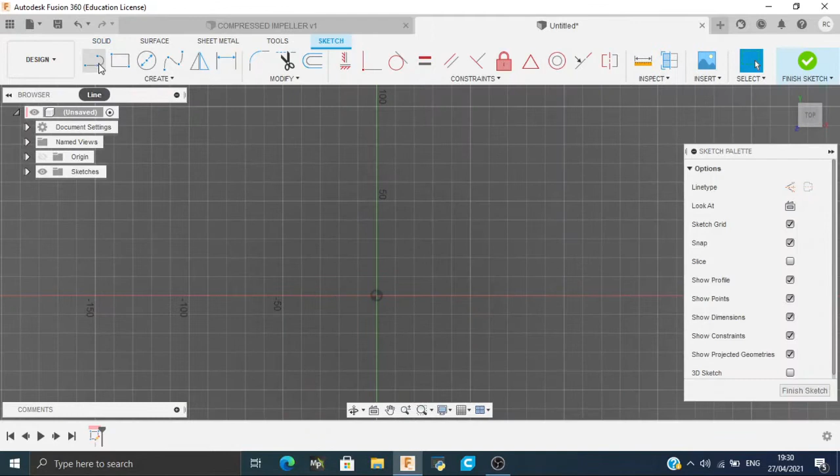To make this compressed impeller, we will create a circle of 76 mm diameter and extrude it to a distance of 10 mm. That would be enough. Press OK.

Now select the top plane and again create a circle of around 18 mm diameter and extrude it to a distance of 30 mm.

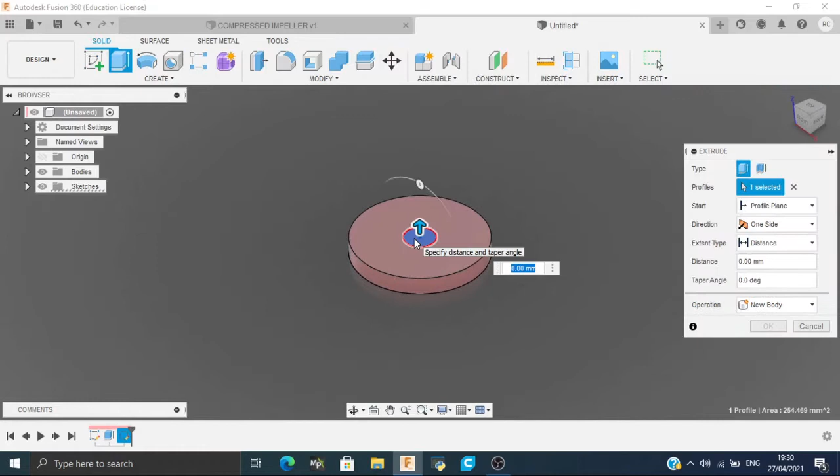After extruding this, go to create, go to coil, select the bottom plane and make a diameter of 76 mm.

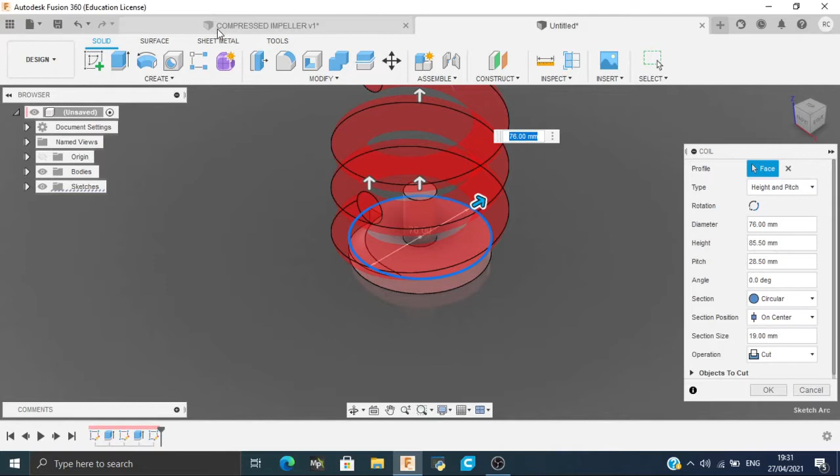For the dimensions, you can see them here: diameter is 76 mm, height is 30 mm, pitch is 250 mm, angle is -10 degrees, section size is 2 mm, and operation is new.

Let's apply it there. Copy the height.

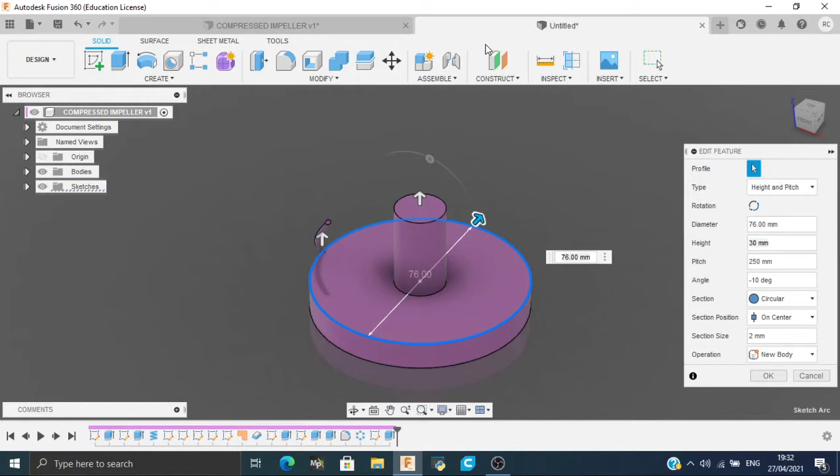Now to create a coil, go to coil from the create dropdown and make a diameter of 76 mm. The height would be 30 mm, the pitch would be 250 mm, and the angle would be -10 degrees, section size would be 2 mm, and operation would be join or new body. Click OK.

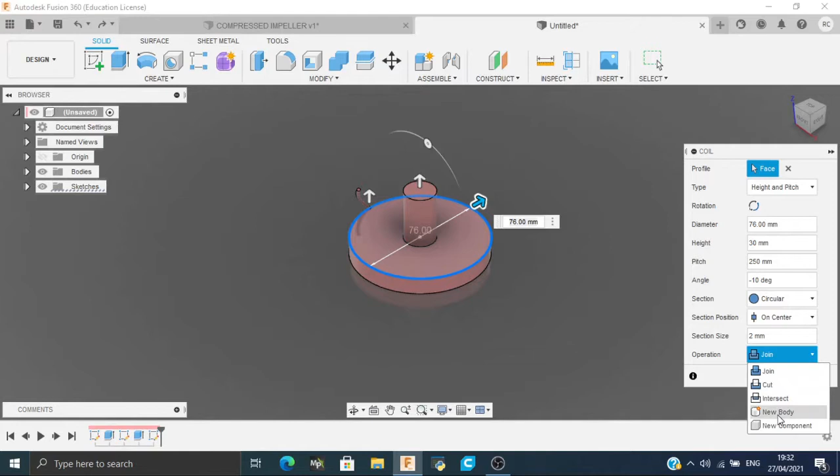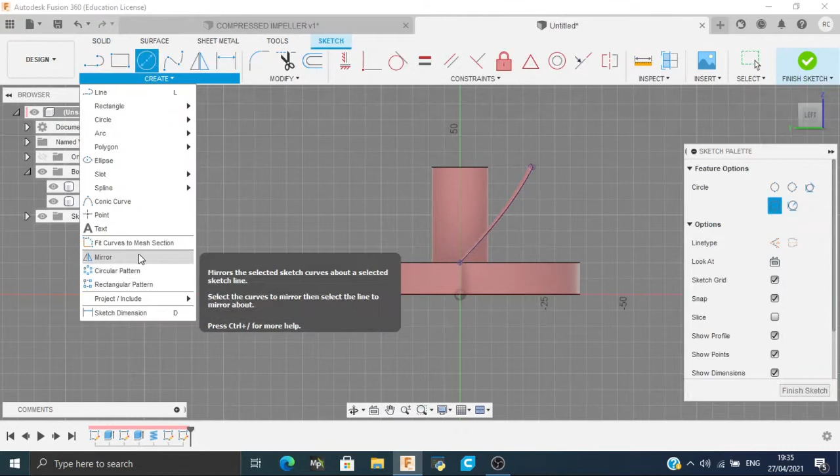Now after making the coil, we have to project the 3D geometry of the coil. So choose any plane, go to create, and select project include 3D geometry, and the geometry would be our coil.

I've already done this. Just hide the second body, or you can rename it as coil.

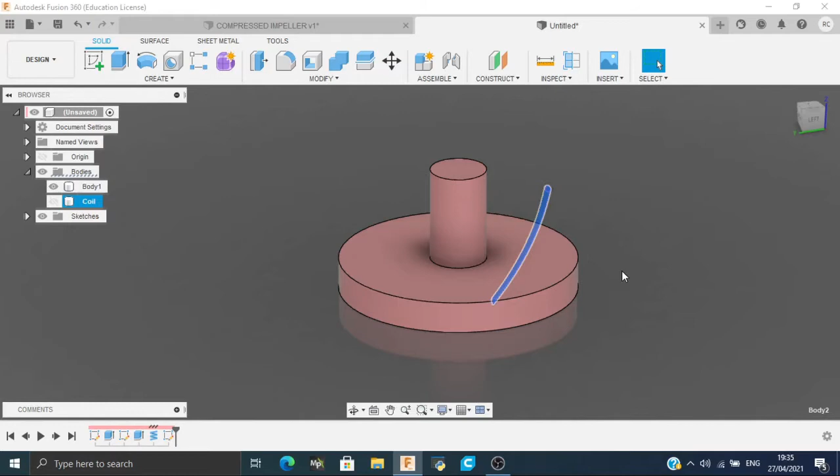Now we have to create a sketch on this plane. Select the sketch, press L for line, and from the origin to this point create a line. Now finish sketch.

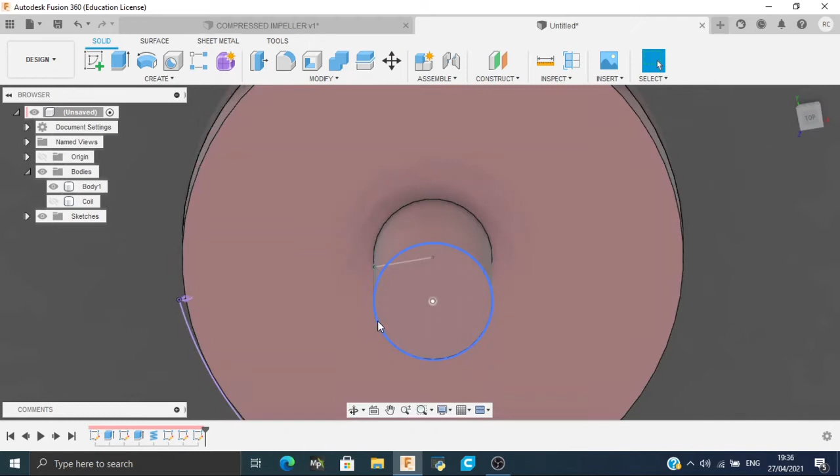Again we will make a point on this plane: go to create, go to point, and select the point here. If you try to move this point, you'll see it is not moving out of that circle—it's constrained to the object.

Now let's select this sketch and this plane and press D for dimension, or just press D for dimension.

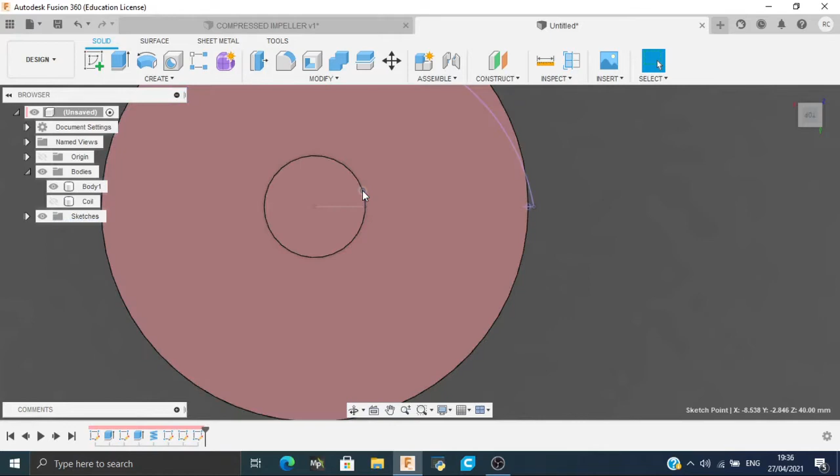Select the plane first, press D for dimension, and choose the point where it is.

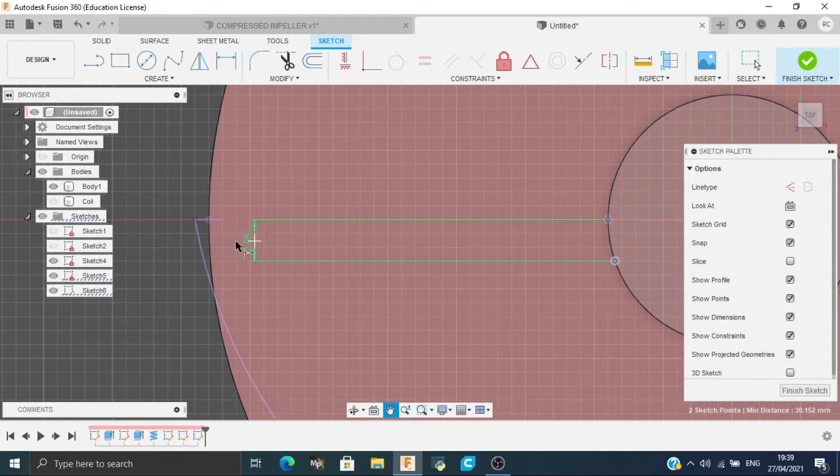After making the point, select the point and the line and give it a dimension of 3 mm. Select finish.

After projecting this line, create a sketch on any plane, revolve this, and activate the 3D sketch.

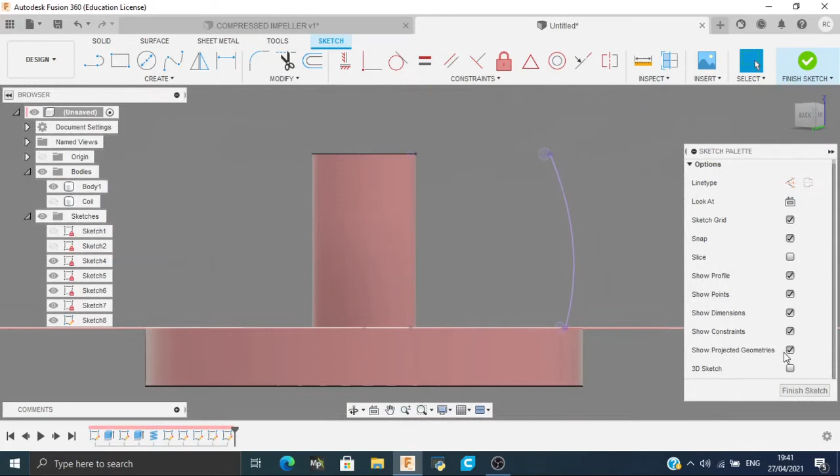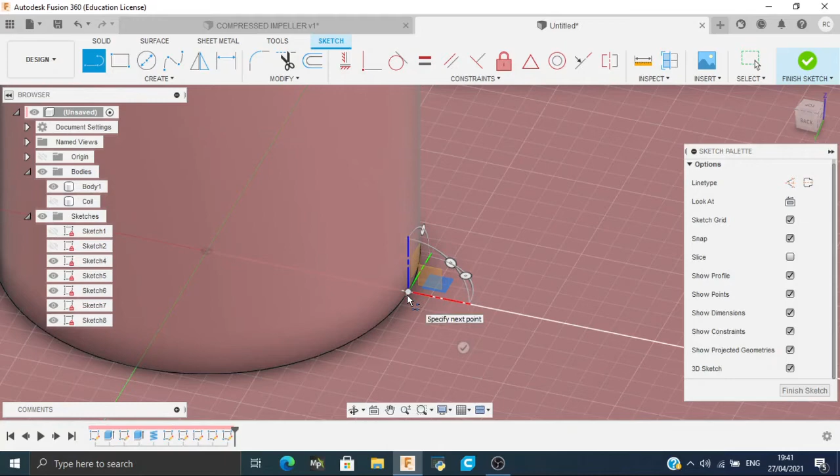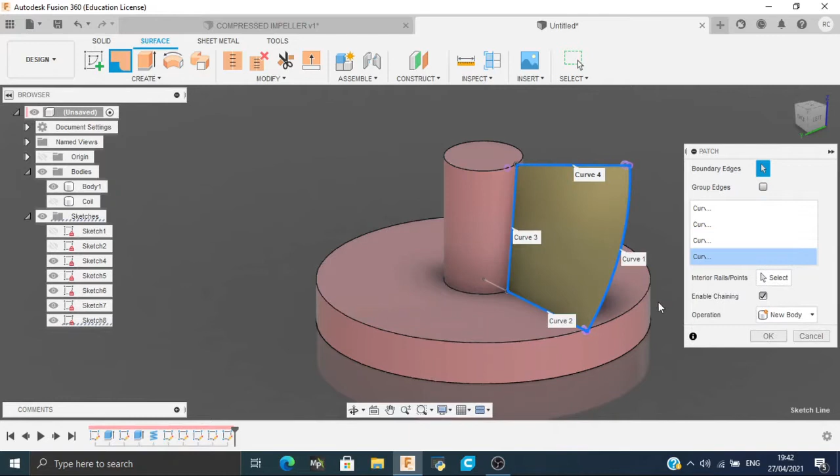Now go to surface, go to patch, select all. It will make a 3D object of that. Select the body and let's go.

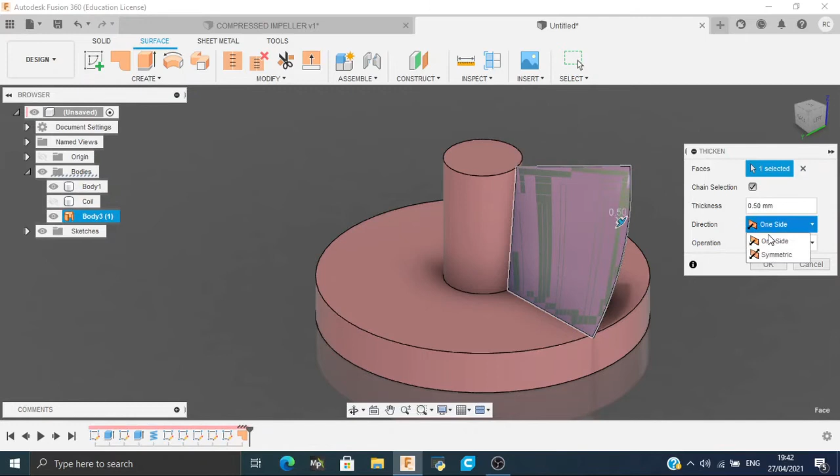Turn off all sketches. Now from the surface workspace, go to create and go to thicken. Select this, set the direction as symmetric, distance 0.5 mm, and operation new. Select OK—now you can see it has made its blade.

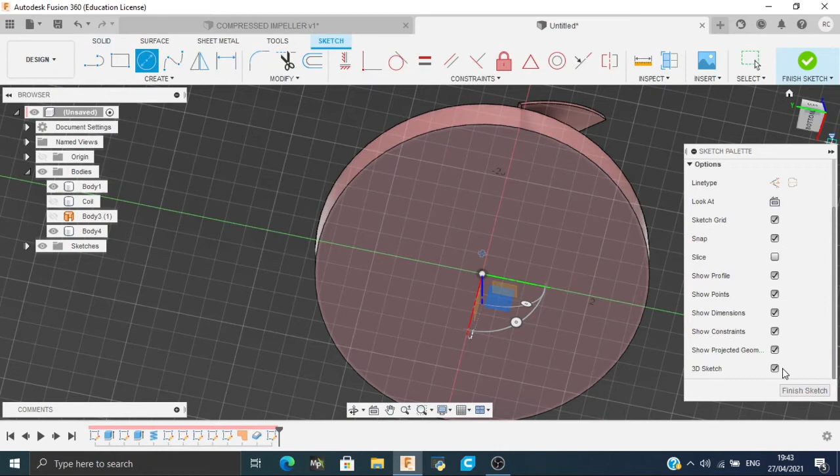Now go to solid, go to bottom plane, and make a circle there, and deactivate the 3D sketch.

Now the circle of 80 mm, and press OK.

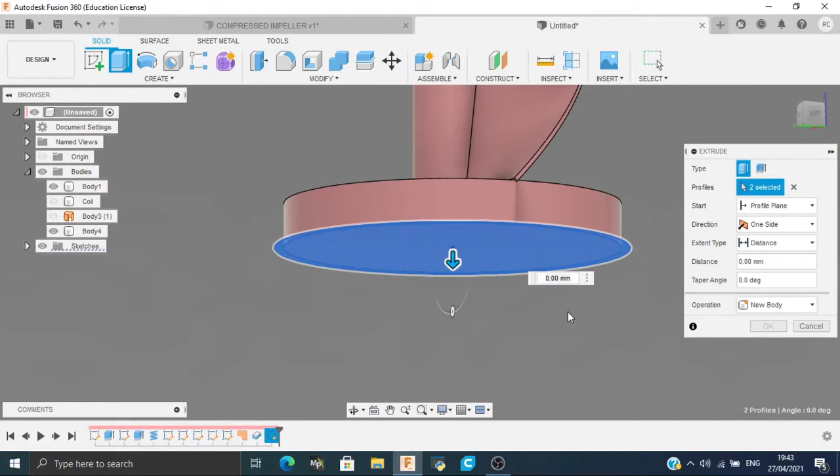Now we have to extrude this. Hit E for extrude, keyboard shortcut, and make it a distance of minus 12 mm, with operation join.

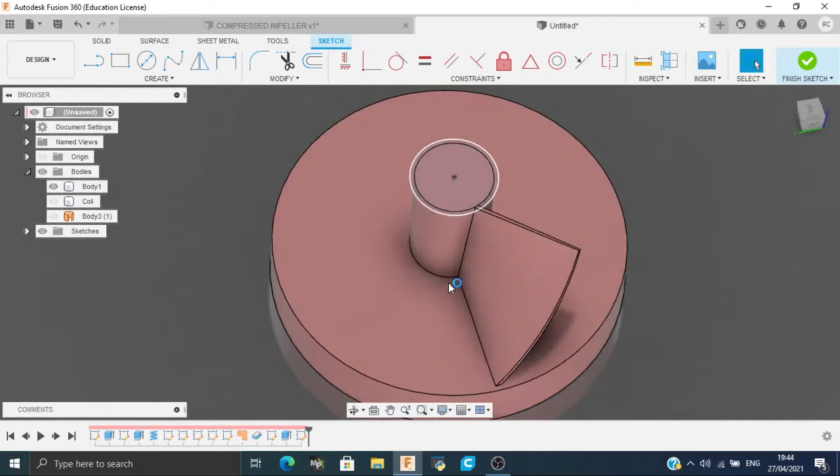Now create a sketch on this plane. Create a circle of 20 mm and extrude this to a distance of minus 30 mm. Again the operation would not be cut, it would be join. Let's go.

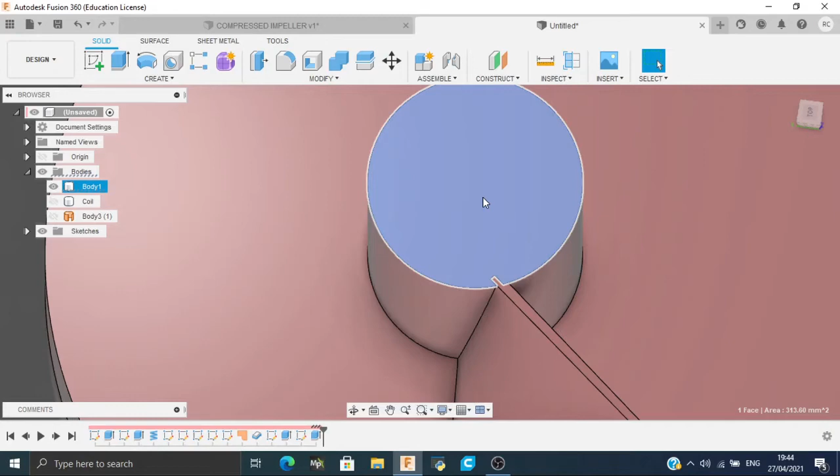Now we will add a fillet here—you can see the blade is just bisecting it, so you can click this place and hit extrude, extruding it to 1 mm.

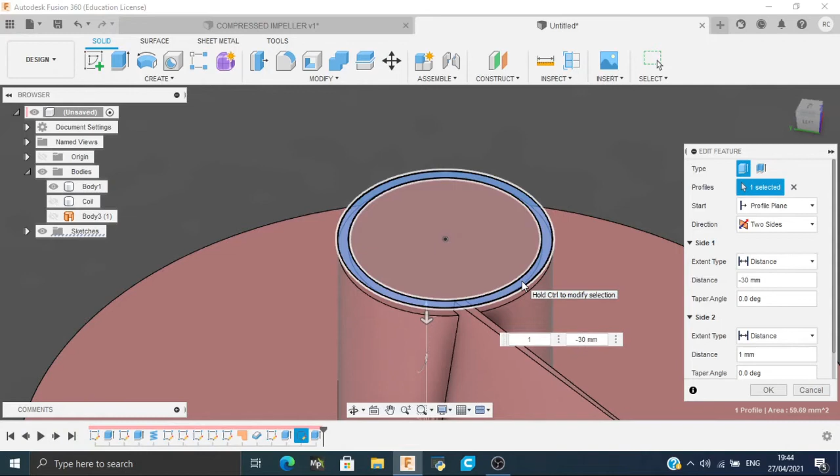Or you just extrude your sketch again, make the direction two-sided, with the second direction at 1 mm. For this portion the distance would be 1 mm, and we have done.

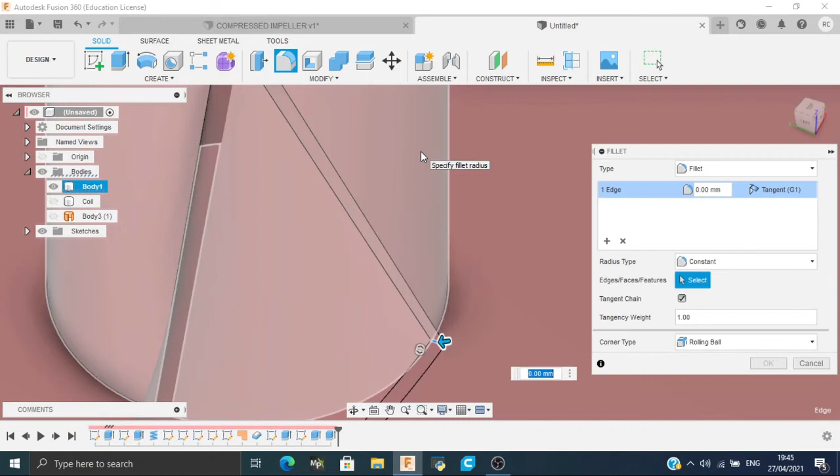Now we have to add a fillet on this edge. Just hit F for the keyboard shortcut, fillet, and add a fillet of 8 mm, making sure the radius type is constant, not chord length or variable. Hit OK and you're done.

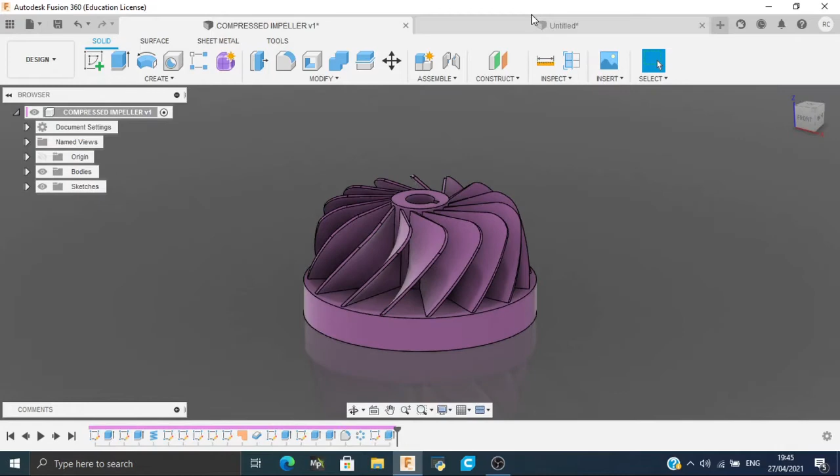Now we have to make it into a pattern like this. Go to create pattern, circular pattern, select features—one feature would be thicken, and the second would be fillet—select the axis as this, and the quantity would be 15.

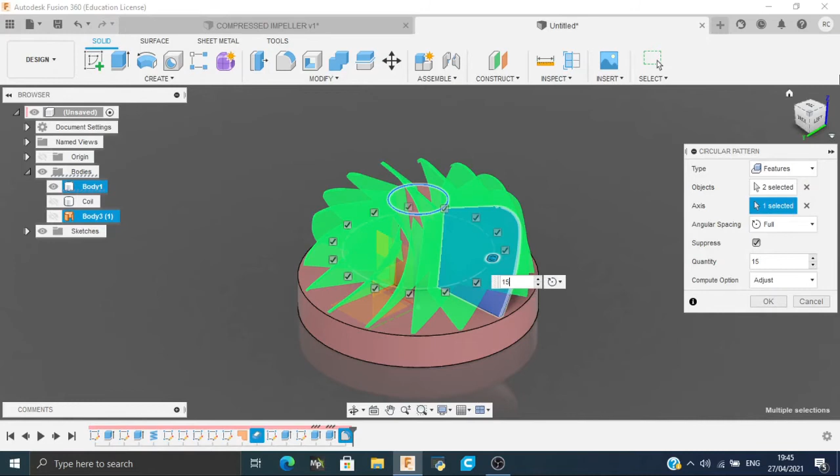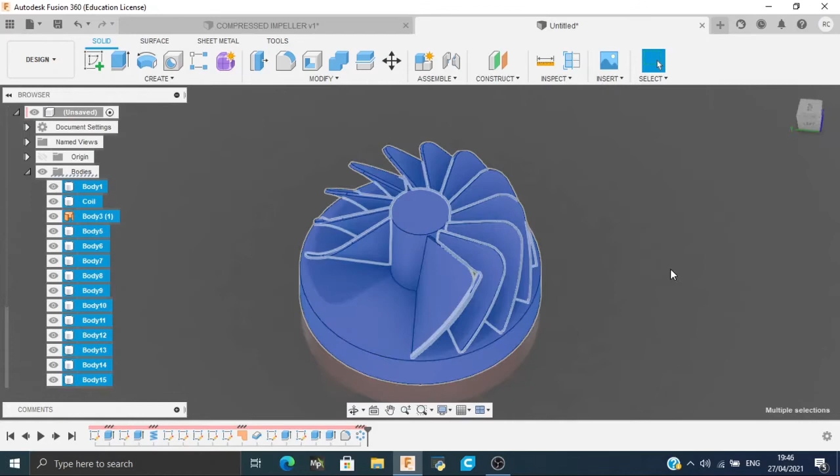It would take some time. Now just make the body visible. Because of some issue I'm having an error here, so let me correct this.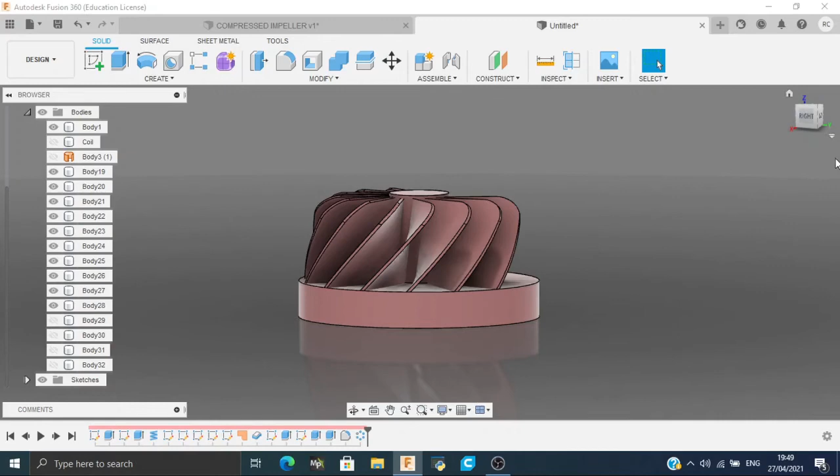I've corrected this—the issue was I had not made the 4 plates visible, so I thought there was an error in making the circular pattern. Now it's normal. Now we'll create a sketch on this plane, and I'm just making a hole with no specific dimensions—you can make them randomly as I'm doing.

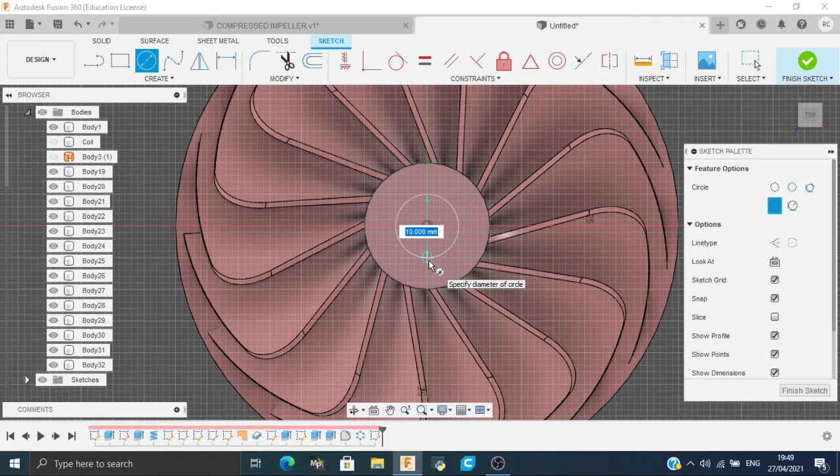Let's make it 10 mm, and make a rectangle here to here.

And we will extrude cut it. Now we will add some appearance to it.

Just hit A, the keyboard shortcut for appearance—like I have done here, I made it blue. For example, I'm now making it red, using anodized glossy red.

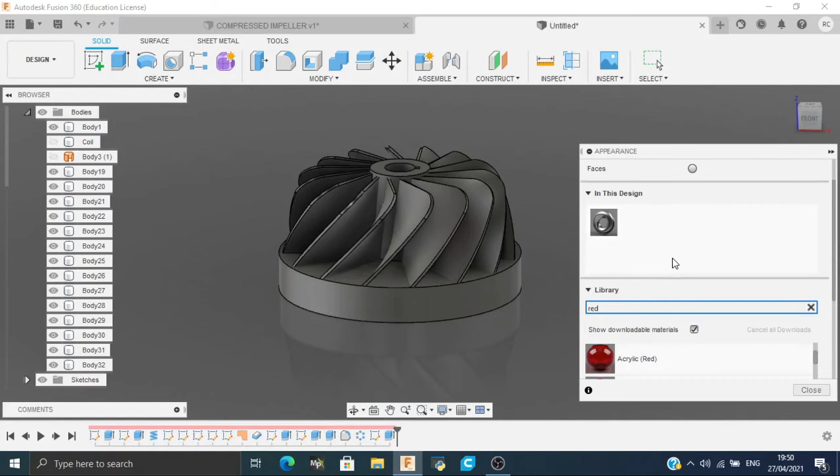Before adding appearance, let's combine, join, with the target body, and the tool bodies would be this.

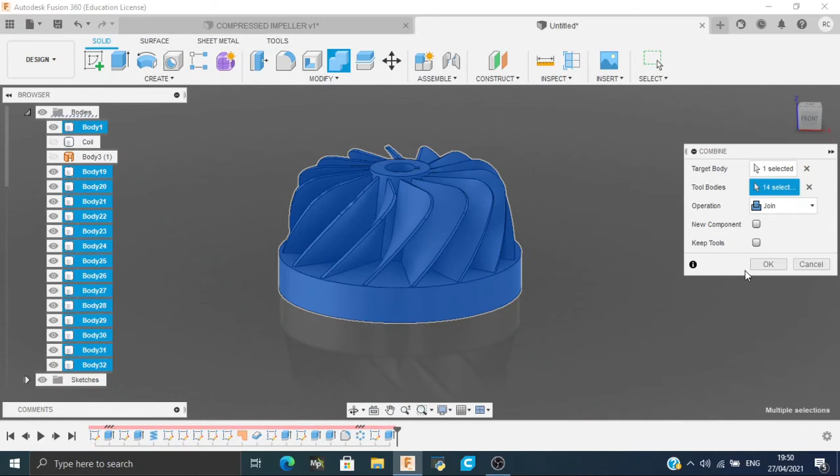Join, and A for appearance—anodized glossy red—and we have successfully made our compressed impeller.